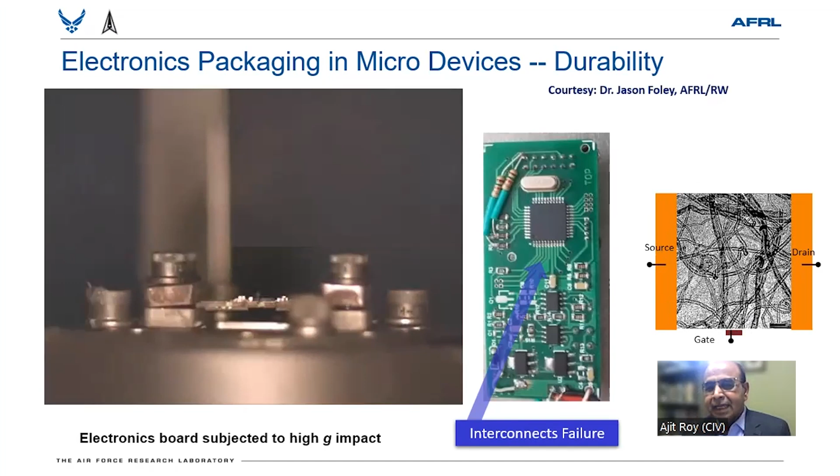locally to offer performance. So with this, I'm going to focus on this concept, for obviously you need flexible electronics: the nanomaterials-based flexible electronics concept by CNT mesh. That I'm going to talk about and use this example quite often.

Another example I want to bring up is, say, electronics packaging for high temperature environment. For example, engine performance monitoring, that's a big issue because if you can monitor in real time the engine performance by putting sensors in the hot zone area, that will give you a close handle in terms of maintenance and real-time repair issues, and hence reduce the downtime on the system performance.

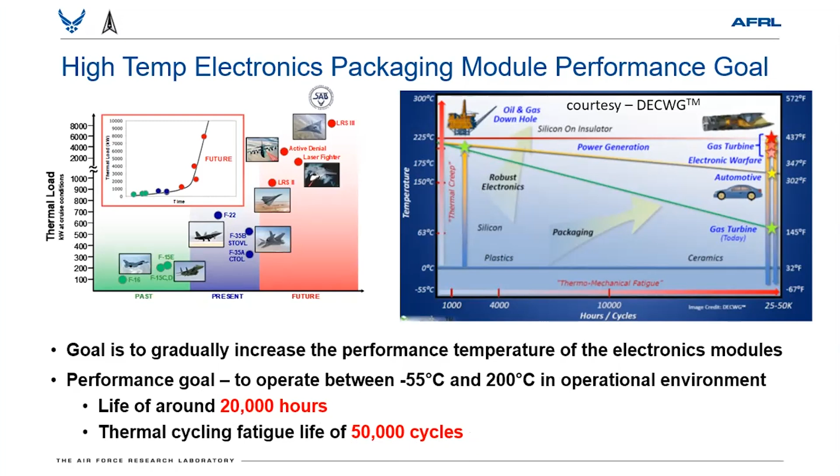In this concept, this kind of sensor's ideal or desirable goal is to perform 20,000 hours or 50,000 cycles, but currently there's no other materials that can offer this kind of durability. Current materials in electronics packaging offer only a few hundred cycles. So with the nanomaterials and materials hybridization, there's some opportunity space. That's what I need to talk about.

Here I want to bring up why bottom up. Bottom up means material design from small scale, meaning atomistic scale. So if you do hybridization, that's what the concept of composites is all about. Then I want to illustrate this concept with this classic example of the three-point bend test.

If you look at the three-point bend test, all the action, materials are going under high strain rate or doing all the work under the point load. So in other words, you need high performance materials near the point load applied, whereas at points away from this applied load, you don't need that kind of high performance materials. That's the idea of hybridization, to optimize materials usage as well as performance.

And if you bring this hybridization as small as possible, then you boost up the materials use efficiency as well as device performance. As I said before, this is a network of carbon nanotubes, and I'm going to make the point what we are after and why this dispersion of carbon nanotubes is not adequate. And similar thing with these multifunctional materials that we are talking about here.

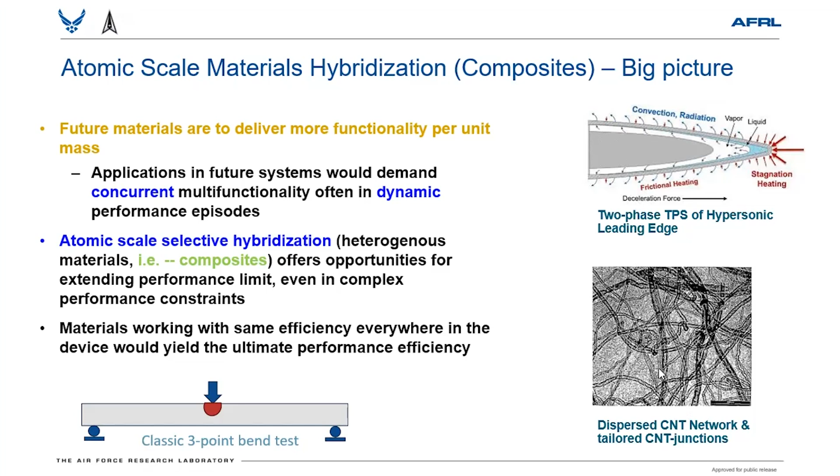So TPS these days is not just oxidation resistant or temperature tolerant material, but also you need to have other functionality like thermal and so forth. With this nanomaterials concept, we offer that kind of functionality. That's what I'm going to illustrate in this talk. So let me start with the very classic example of carbon nanofiber reinforced polymer composites.

You know, carbon fibers are quite strong structurally, and they have decent thermal and electrical properties along the fiber direction. Whereas when these are embedded in polymer, their transverse properties are not as good as in the axial direction, both structurally as well as thermal or electrical properties.

People in the community have been trying to grow carbon nanotubes, decorate carbon fiber with carbon nanotubes like depicted here, with the hope that when they are embedded in polymer, these carbon nanotubes will make contact and create a pathway, and this contact will provide some structural rigidity to improve the structural as well as thermal and electrical properties. But in reality, the achievement has not reached the level of the expectation.

Case in point: for example, epoxy strength is 6 KSI, whereas carbon nanotube is 40 GPa, or 40 MPa versus 40 GPa. So carbon nanotube is 1,000 times stronger. So if you mix, say, 1%, you expect the strength will go up proportionally, but that doesn't happen because of all the interface issues, how they are connected to each other.

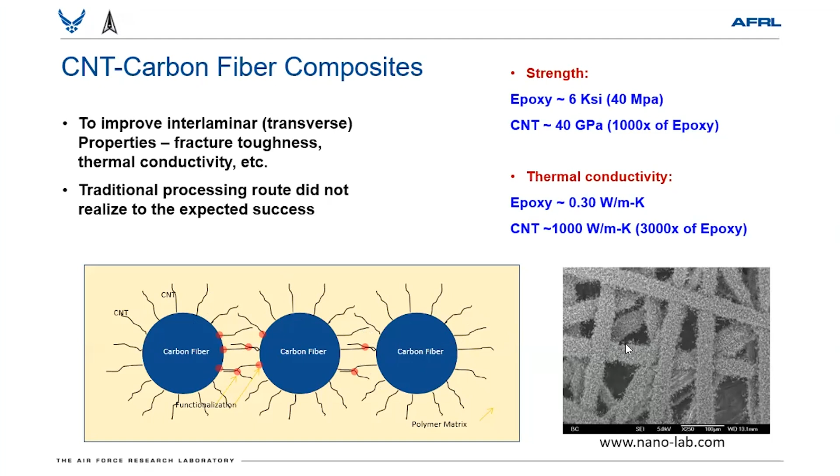Another key driver in this interface design concept, and also why carbon nanotube network with the connected network will offer higher performance as compared to dispersed carbon nanotube. Let me illustrate this with this example here. Say, carbon nanotubes are not infinitely long, they're discontinuous, and when they are dispersed in polymer, they are just dispersed in polymer, not necessarily making contact to each other.

Whereas if you can ensure these carbon nanotubes are interconnected with welded junctions, for example, then in case of this crack propagating, if they are not robustly connected in all the nanotube mesh, this individual nanotube will try to deter crack propagation, but not necessarily all other nanotubes will contribute unless their network is robustly interconnected with welded junctions and so forth. That's the concept. So with this network concept, we can boost up the properties that we are missing in just mixing carbon nanotube.

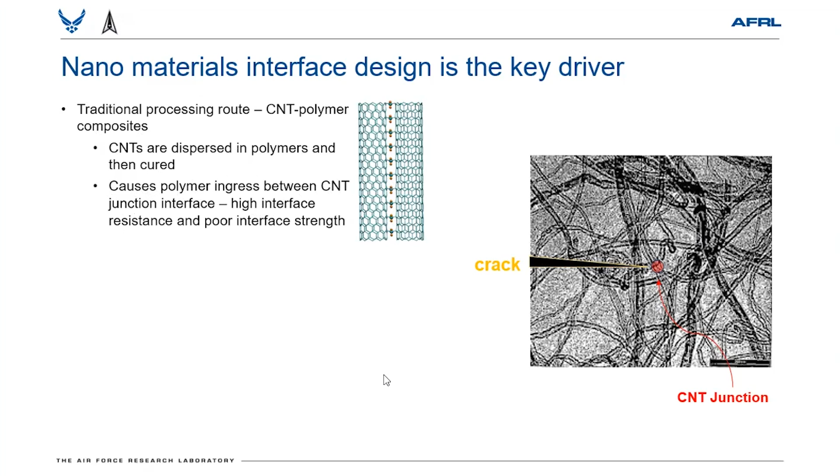So in the traditional processing route, you disperse carbon nanotube in polymer and hope they will provide the improvement, but that doesn't happen because as soon as you put nanotube in polymer, polymer gets in between carbon nanotubes, hence the interface will not be as robust. Whereas before you put the nanotube network in polymer, you create the network junctions by either heat treating to weld the junctions or decorating the nanotube with some other metal or other materials. Then by heat treating, that creates a network of welded junctions interconnecting nanotubes.

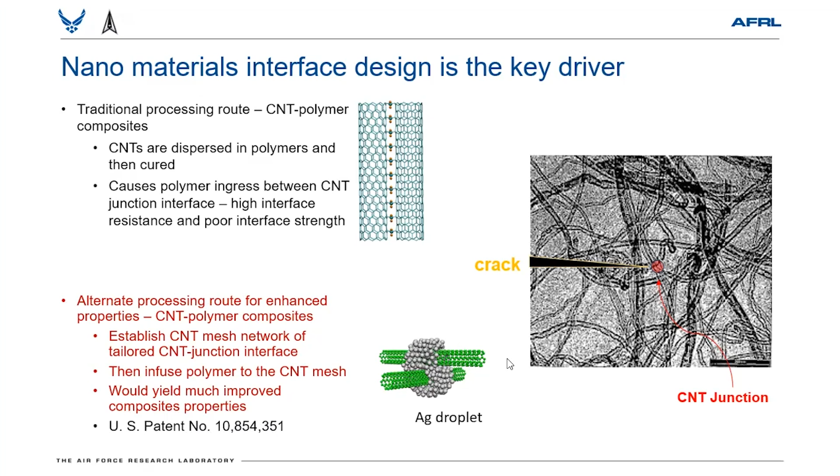After you create the network, then you infuse the nanotube network with polymer, and then you have the integrity of the network nanotube, and you will get the higher performance. And that's the process we have demonstrated, and we have patented this process as well. So this is what I am talking about. You create the network junctions of nanotube, then infuse polymer, then you get the improved properties. So this is an example of such a process.

This is the bonded joint, and I got motivated for this idea by Dr. Ed Silverman from Northrop Grumman. He told me that if the bonded joint through-thickness thermal conductivity can be improved from traditionally say 1 watt per meter Kelvin to 10 watts, there's a big savings, say $1 million per satellite. So that's the big savings over the lifetime of a satellite. So we developed a process.

We used aligned carbon nanotubes, then infused polymer and etched away polymer from the tips of the carbon nanotubes to make a thermal contact. That's what we came up with from our finite element calculations to create the thermal contact through the thickness of the bonded joint. And in this process, after etching polymer, we decorated the tips of carbon nanotubes with metallization, called ion etching, and that is documented here. And then we cured the bonded joint.

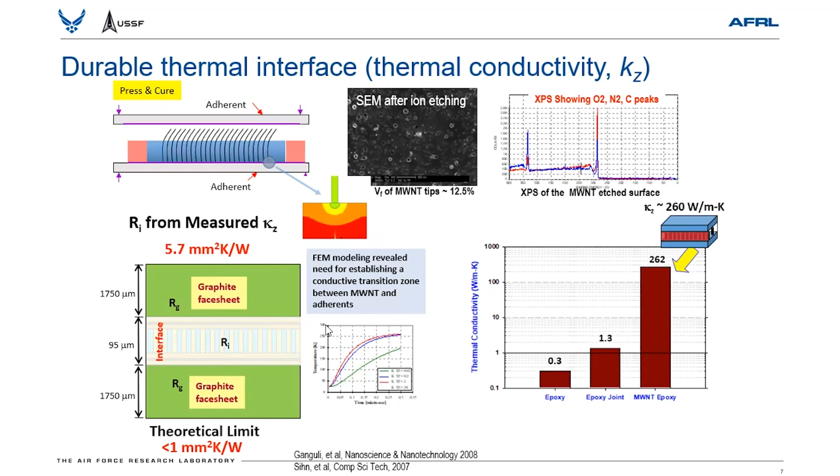So we want to look at this problem a little further. From these measured properties, we back calculated the interface between carbon nanotube and this conducting sheet. And the interface resistance comes out to about 6 in this unit, whereas if you do the right engineering, you can go to less than 1. So there's still room for improvement even if we showed good success in this design. That brings up the point of looking at this problem more atomistically, hence bottom-up design. That's the nutshell, the message I'm conveying here.

So what is the bottleneck and what is the challenge? If we want to pursue this networked carbon nanotube mesh, how do you design the interface? As I showed in the previous example, the interface is the key. Unless you do the right interface design, you will not achieve the properties. There's nice work from over a decade ago on dispersed carbon nanotubes. Nothing is done on interface design, just laying one on top of the other. And with AFM, atomic force microscopy, they measured the electrical resistance of carbon nanotube along the length, then at the junction.

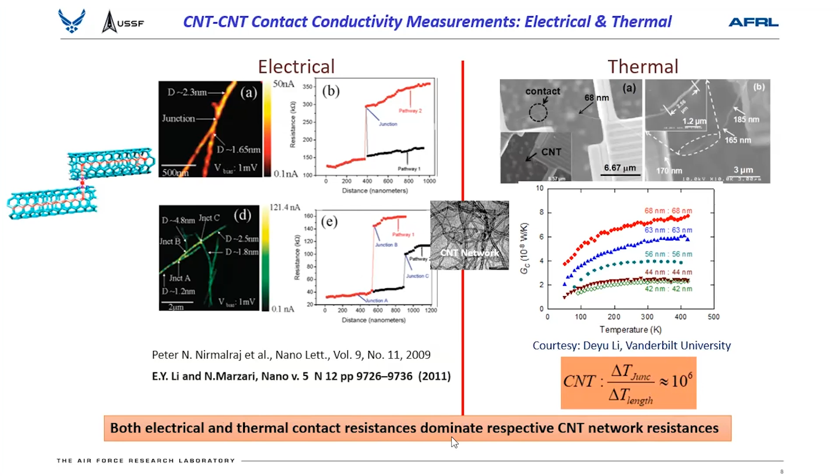If you follow the nanotube across the junction, same nanotube, there's not much of change. Whereas if you jump from one nanotube to the other nanotube through the junction, there's a big resistance. This interface resistance is quite high unless you tailor this interface properly with nanoscale material design. This is for electrical. Same is the case for thermal, and that interface resistance is very high as compared to the individual carbon nanotube resistance.

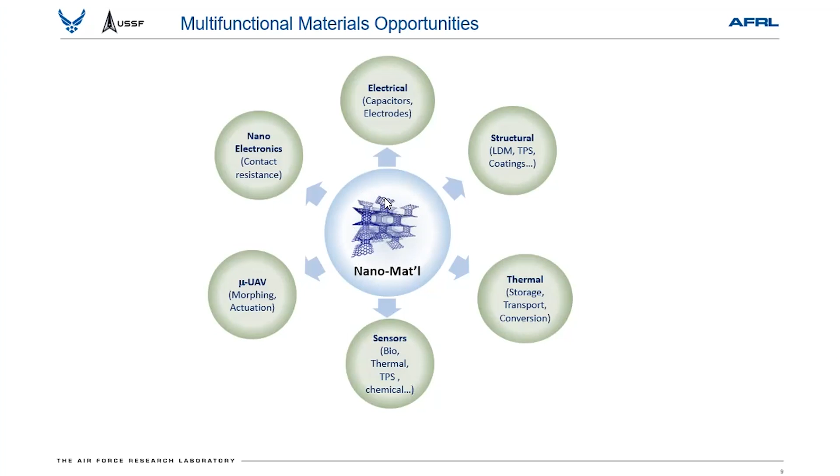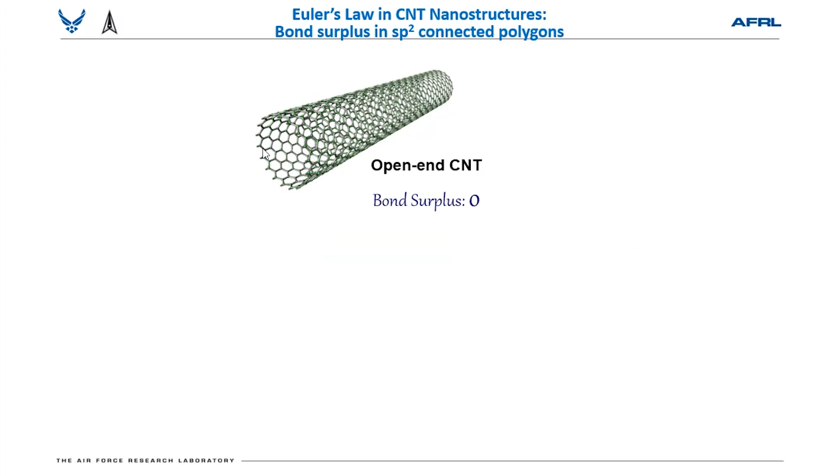So first, let me focus on the structure, meaning I'm looking at it from the strength point of view. So from a strength point of view, how do you create this kind of junction or nanotube? There's a way to look at the junction optimization. Euler law for CNT nanostructure based on sp2 bonds means nanotubes are planarly junctioned to each other. For sp2 bonded nanotubes with open ends, with the energy, we can benchmark to 0 level, called bond surplus 0. All carbon nanotubes in this case are 6 member rings.

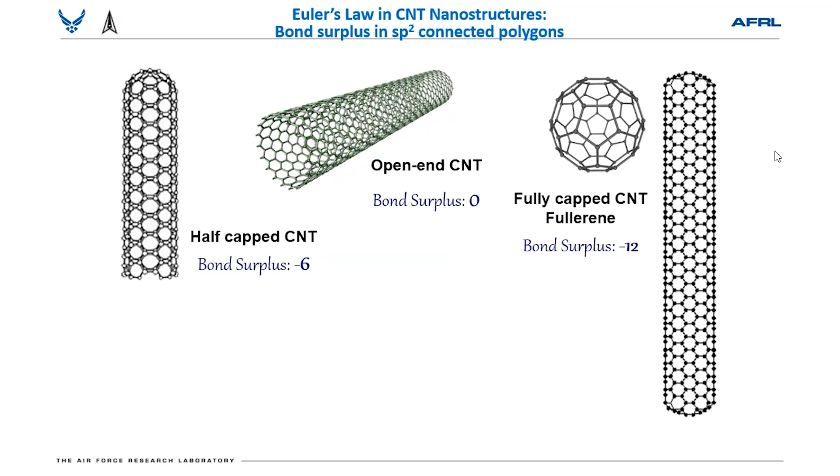And then when you look at the other geometry, half-capped CNT, meaning this end is capped, then you no longer have only 6 member rings. There are some 5 member rings, and you need 6 of them. So that brings bond surplus minus 6. If you do double-capped CNT or fullerene, because of the same concept of 5 member ring accommodation to 6 member rings, bond surplus becomes minus 12. For a junction like graphene to CNT, you need 7 member rings, and that brings bond surplus plus 6.

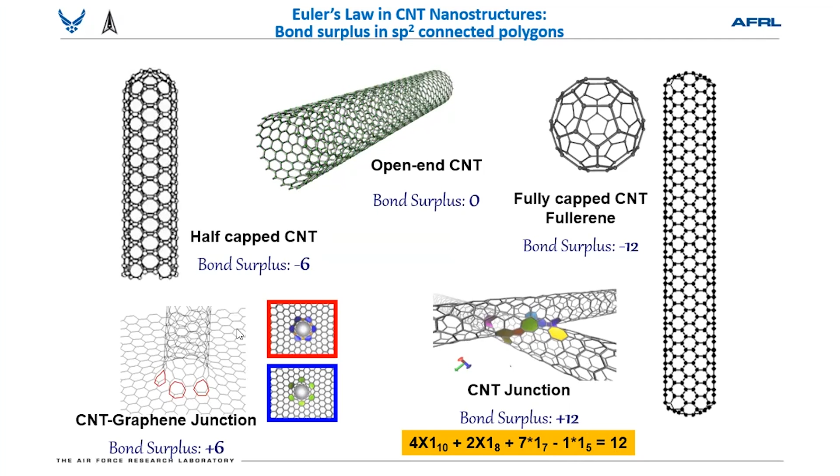For CNT-CNT junction, such abnormality, meaning deviation from 6 member to 7 or 5, the bond surplus for minimum surface energy of the surface topology brings bond surplus to plus 12. That's the basic design concept in terms of creating junctions from the strength point of view for carbon nanotube structures. So we have done the strength prediction with this surface topology optimization, adapting the tools we have developed, molecular mechanics and molecular dynamics. Molecular mechanics is similar to molecular dynamics, but we took away the dynamics part to focus on static problems. Combining these two, we can create the junction as well as analyze the strength. This is the case for graphene with carbon nanotube junction.

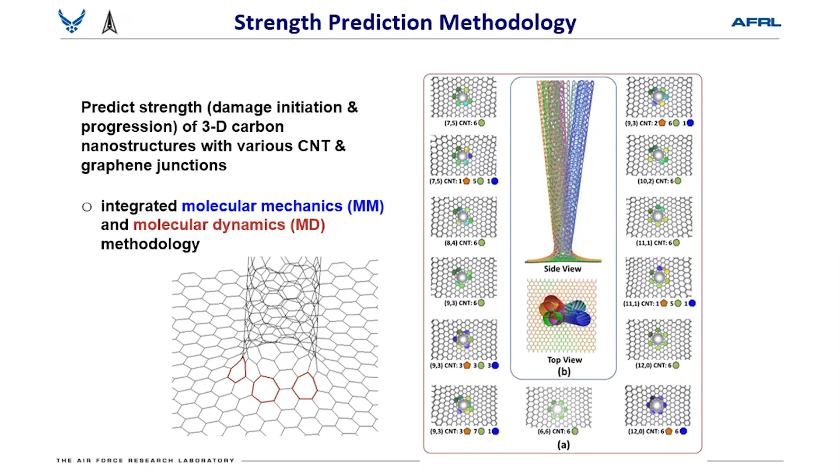Of course, carbon nanotubes have different chirality, and that gives the challenge. As I said before, to create this kind of junction, we need 7 member rings to accommodate this kind of curvature. And depending on the chirality of the nanotube, the distribution of these 7 member rings around the circumference of the junction sometimes gets irregular, not uniformly distributed, unless it is armchair, 6-6 ring, where these are equally distributed around the junction circumference. So with this, we did the calculation for strength prediction for different chirality junctions.

As you see, for armchair, 6-6 ring, these 7-member defects are uniformly distributed across the junction area, and that is like structural mechanics. When your defects are uniformly distributed, that gives you a higher strength or load carrying capability. The same is true here. As you see, when these defects are regularly distributed, we get higher strength as compared to the irregular distribution. So that's the design area if you want to join graphene to CNT.

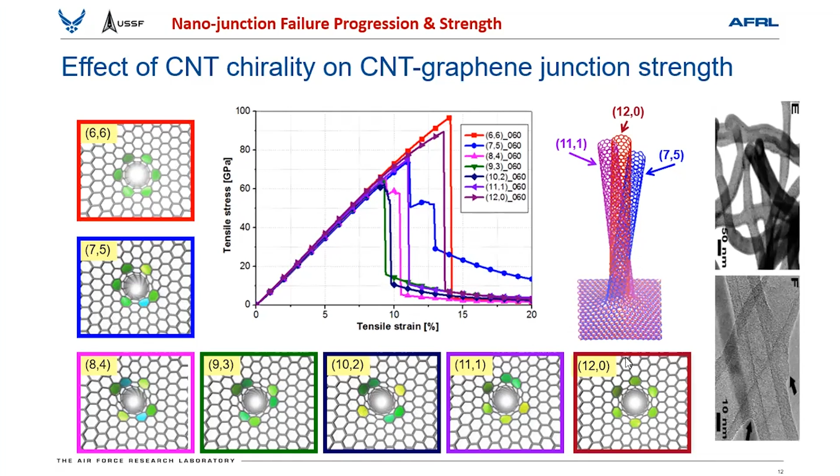But more practical option. Oh, so one more thing I want to say. Those calculations are very idealistic cases, meaning very pristine CNT, but in reality that doesn't happen. When we compare our prediction with the measurement, this is the work we have done in collaboration with Professor Jun Lou from Rice University. He did the strength measurement with AFM. The measured strength is quite low, 2 orders of magnitude, I would say, lower than what we are predicting.

Reason being there are many other attributes, irregularities, taking place in the experiment. For example, some nanotubes are not attached to the carbon fiber surface, or some are with defects, and all these factors play a role in terms of what we measure.

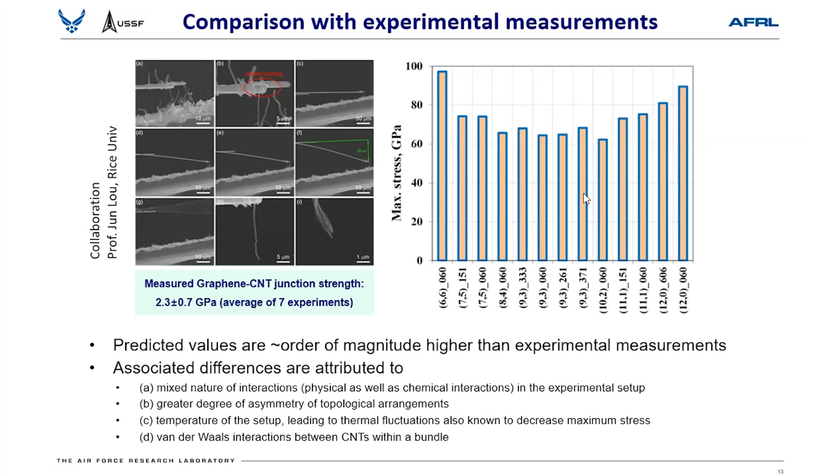So then we have a long way to go to relate our computation and small scale to the real measurement properties. But computation gives you a trend that will be a guiding principle for designing materials nonetheless.

So next, we want to go to a more practical example. As I said, carbon nanotube mesh. That's the idea. So when you want to join the carbon nanotubes next to each other, as I said, all the defects you need to optimize, 7-member, 8-member, or 5-member, and their distribution. And their distribution depends on how they are connected to each other, either fully fused or barely fused.

And so we look at all these problems, and with this calculation, we find, as you see, the barely fused junction gives you higher strength as compared to fully fused. Although one may assume that, okay, fully fused will be more robust.

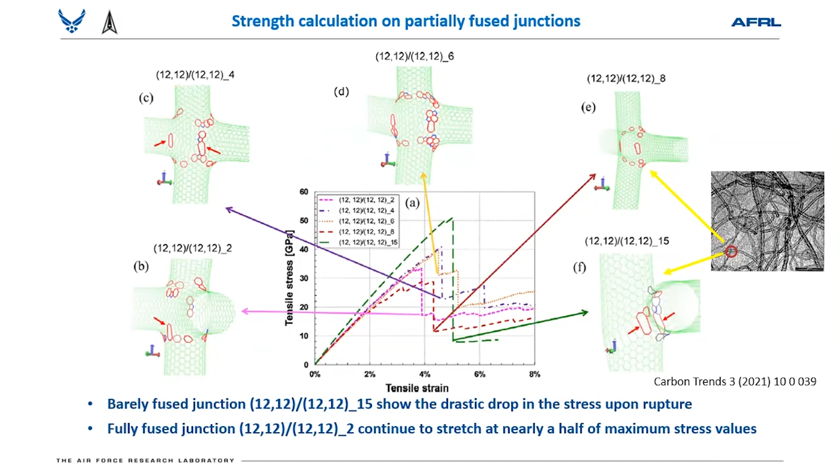That's not the case. Reason being, when you are fully fused, you are destroying the nanotube integrity, hence its load carrying capability, as compared to barely fused, where you retain as much of the bond integrity within the carbon nanotube or atomistic configuration than the fully fused.

And from a practical point of view, this makes sense because from a processing point of view, it's also easier to fabricate, because you just lay carbon nanotubes on top of each other, then do heat treatment. That would create a welded junction, versus creating this kind of junction is more tedious because that requires more process control and also computation from doping and so forth.

So this computation gives guidance to processing engineers on how to design this kind of junction. And we are the first to show that overlap junction creation is much easier and also, from a strength point of view, robust as compared to the fully fused junction.

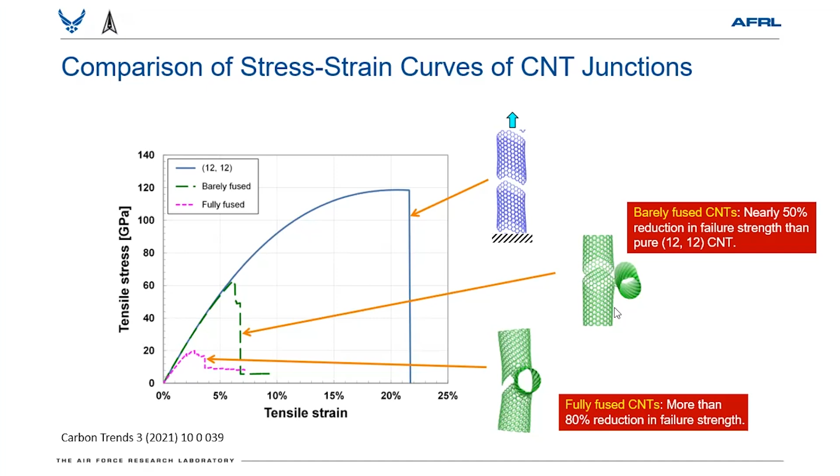Now I'm going to go to the thermal part. So as I said, thermally mixing carbon nanotubes with each other doesn't give you the improvement in thermal conductivity. So we want to look at this problem very carefully. As I said before, this is also a thermal interface design issue. So this is the case.

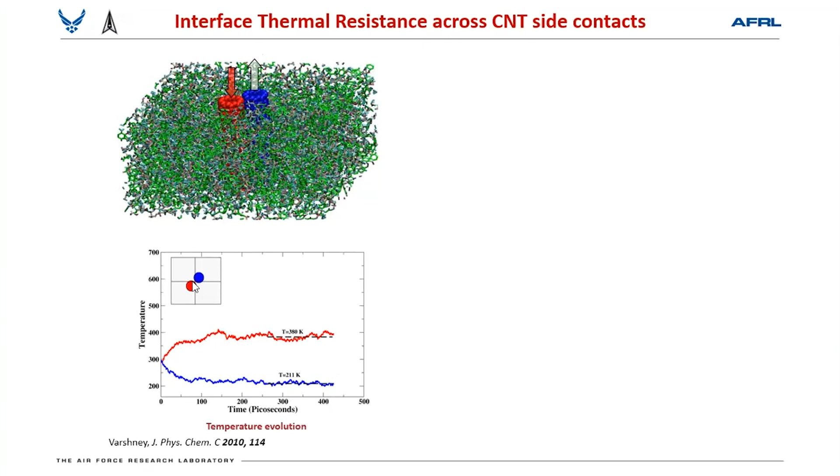We are putting two nanotubes next to each other, and we are heating one and taking heat out. And after equilibrating, we see there's a disparity in temperature, even at the walls next to each other, of this cold and hot nanotube. That means there's a significant thermal resistance at the interface of these two junctions.

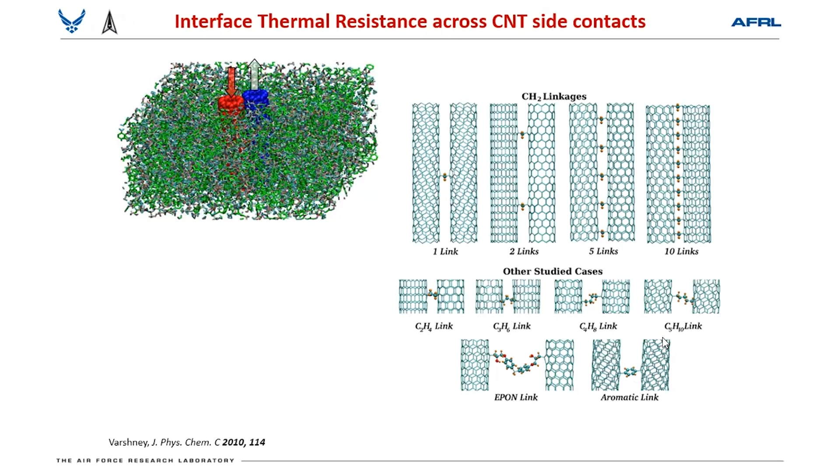So another option will be to functionalize these nanotube walls instead of van der Waals walls. You can functionalize with different molecules, either small molecule, big molecule, rigid molecule, and soft molecule. We look at those problems.

Of course, increasing the degree of functionalization improves the interface thermal conductance, but still we are not seeing the resistance diminish to zero. That means there's room for selecting this molecule. So we look at different types of molecules.

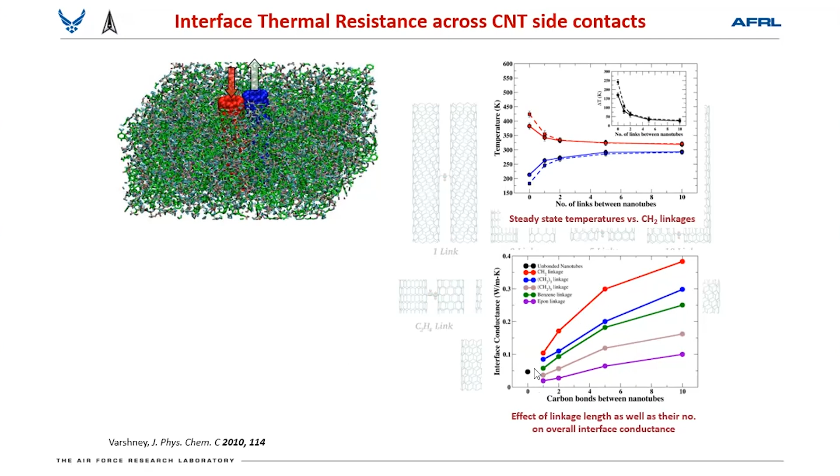We find that smaller molecules and rigid molecules give you higher conductance than van der Waals properties. But still, there's room. How do you select these molecules? We then looked at this problem more carefully with a wave packet calculation, or phonon wave packet.

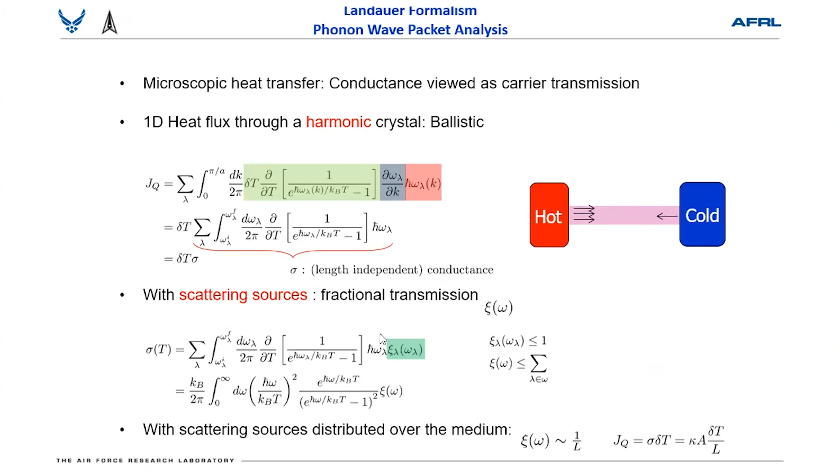In this calculation process, we look at energy specifically, where we can send one specific frequency of phonon and look at the transmission coefficient. And that transmission coefficient will give you an indication of how robust the interface conductance is. So where you put the molecule for functionalization, that's the site.

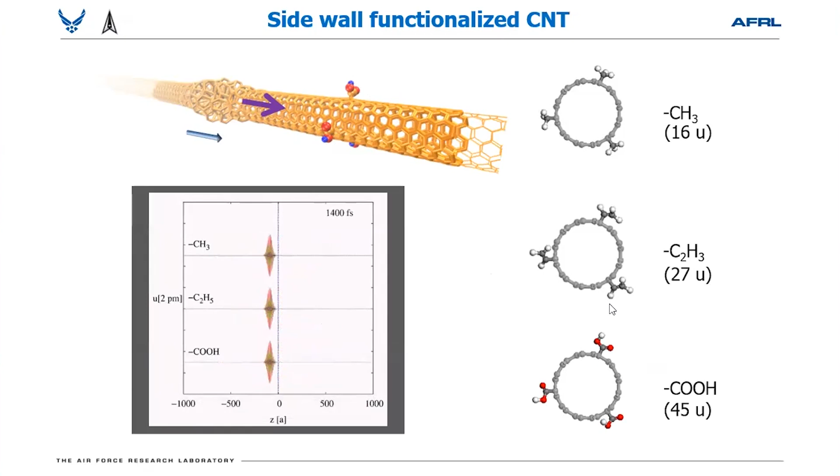Some energy will transmit, some will reflect back, and that can be assessed properly, and their efficiency can be assessed by looking at their dispersion curve. The slope of the phonon dispersion curve is the group velocity, and that group velocity is integrally proportional to, or follows, the transmission coefficient in respect of all the different molecules we have here.

So here is the design selection criteria of molecules: you can pick a molecule that gives you higher group velocity as compared to low velocity. And the group velocity is proportional to the bond modulus of the junction of the molecules and inversely proportional to the mass. So the smaller the mass and higher the bond energy, the higher the thermal conductance.

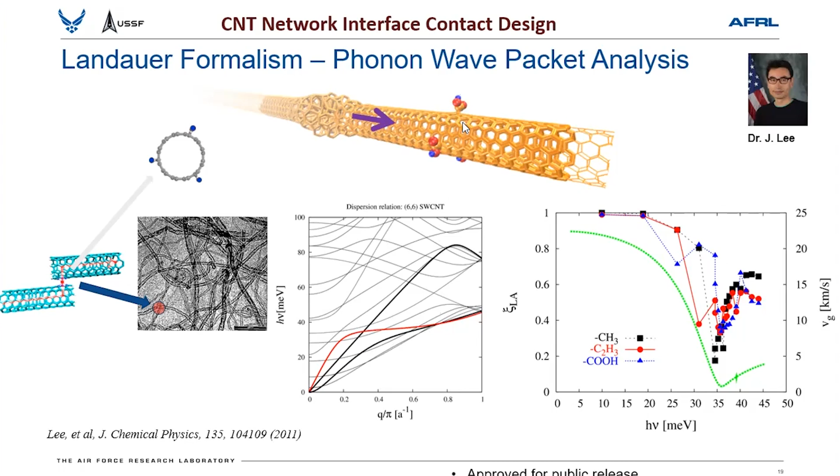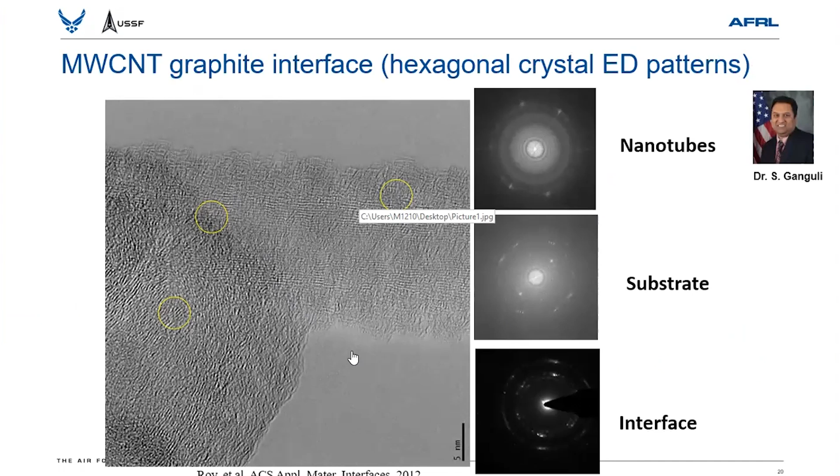So in the case of carbon nanotubes, to maximize that, you need to minimize the difference in mass and also bond. You need a similar molecule. If it is carbon, it has to be carbon. And that's the ideal interface. And we created those interfaces, but those are very tedious and time consuming and practically probably not feasible.

Instead, we can adopt metallization, because metal is conductive. What if you put metal at the interface? That's where design comes in. That can be assessed through density of states spectra, phonon density of states: overlap of the density of states of the metal you are decorating with, or putting at the interface with the nanotube spectra, phonon spectra, gives you a higher, improved interface conductance. That we have done.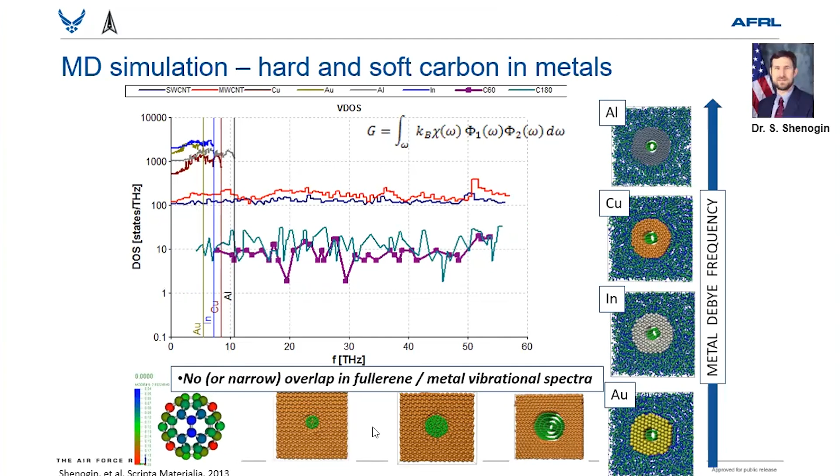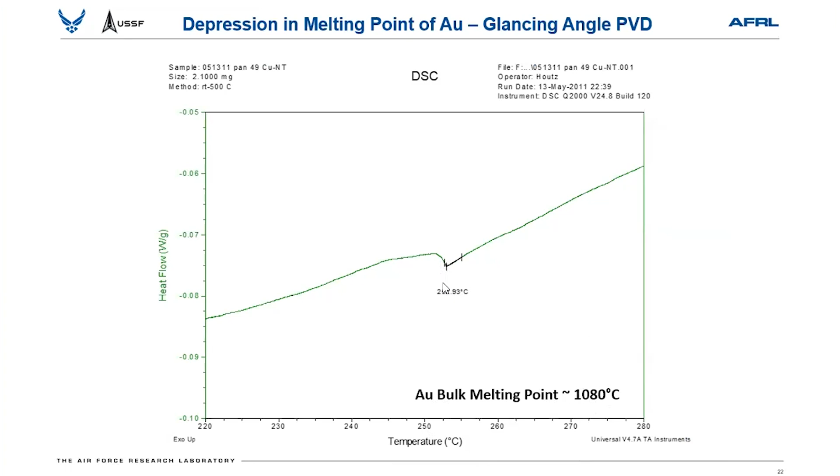So you can pick different metals: gold, copper, aluminum, and so forth. We demonstrated that with gold. Gold's melting point is over 1,000, whereas carbon disintegrates after 550 degrees Celsius. So how do you tackle this issue? But there's a brighter side. If you make it nano size, in this case 5 or 4 nanometers, we see the melting temperature of gold drops to 260 or so.

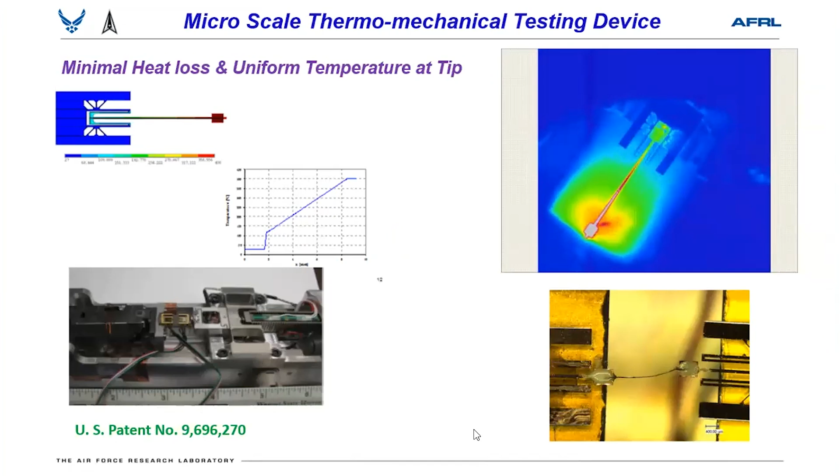So with this, we decorated nanotubes with gold nanoparticles of different sizes, and also with other metals. And we found, as we predicted computationally, chromium, titanium, copper are much better than gold. And that is validated experimentally. We measured those properties, and those measurements are done on a micro scale testing device we have developed, and that is patented, in our laboratory.

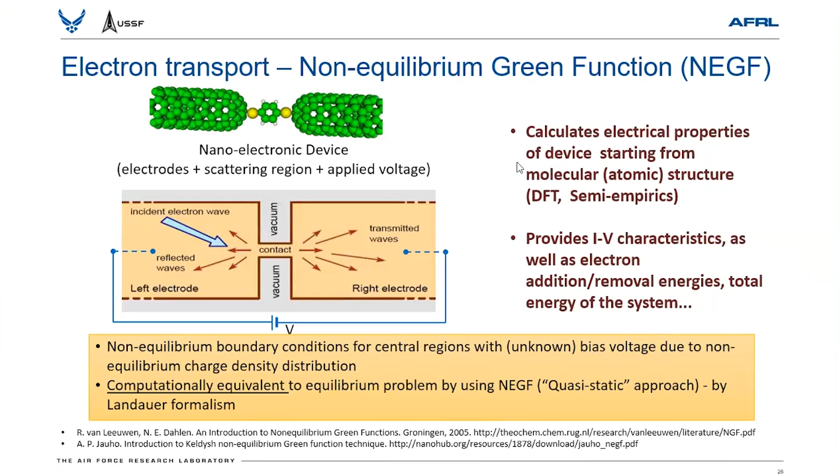Now, the final topic: electrical properties that we looked at at the interface by tight binding non-equilibrium Green's function, and we have published this work. You can follow it. Because of time, I'm not going to talk about the methodology. But what I'd like to say is, in the case of this junction design for electrical conductance at the interface, electron orbitals play a role. Overlap of electron orbitals dictates the electrical conductance.

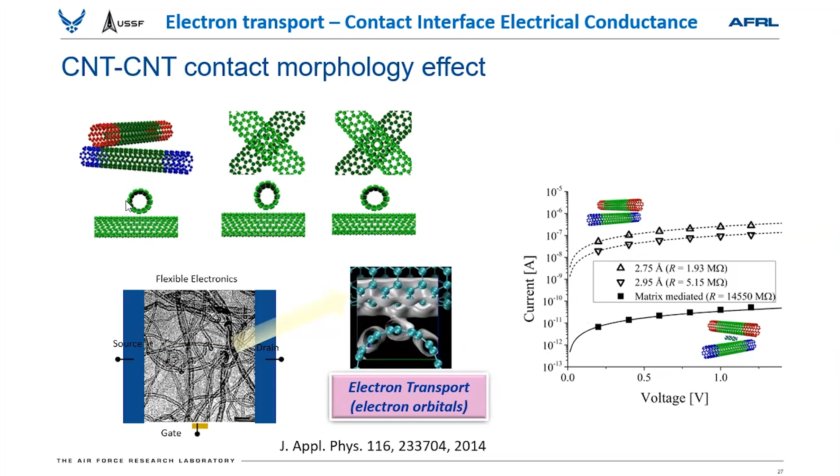If you make carbon nanotubes smaller, their electron orbitals spill out of the circumference, hence the higher overlap. And that's what we observe. At the same time, if you put some molecule in between, that kills the conductance. So from the design point of view, smaller nanotubes packing close to each other without any polymer functionalization will give you higher electrical conductance. Another option will be metallization.

You can use different metals to decorate the nanotube interface and fuse them, and they give a higher improvement, 200 to 400 fold in case of titanium and copper, silver. One point I'd like to make: in thermal, we saw that titanium is the preferred metal for interface welding, and so is the case for electrical. So that gives you the simultaneous functionality that I mentioned at the beginning of my talk.

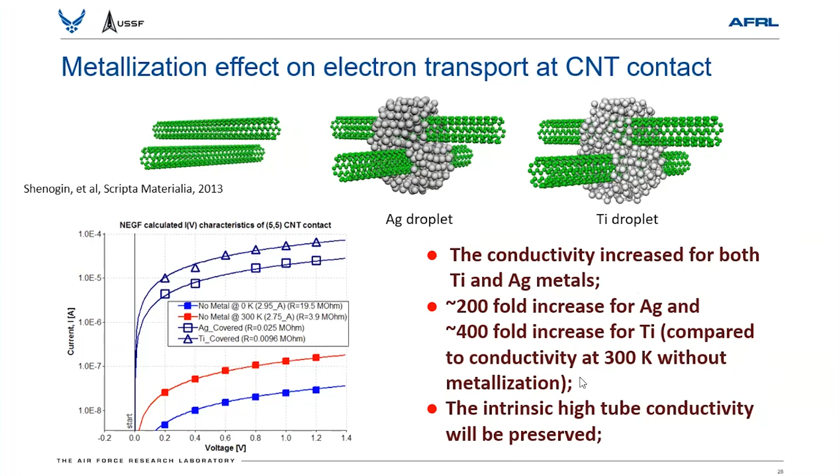So after all this, we made some materials without functionalization. Then we tested them. This is the moment of truth: split Hopkinson pressure bar test, high impact, high g testing. And we found that with this CNT mesh optimization, interface design, and putting in polymer, creating a CNT ink, this material survived the high impact scenario, whereas without modification, we didn't get any signal.

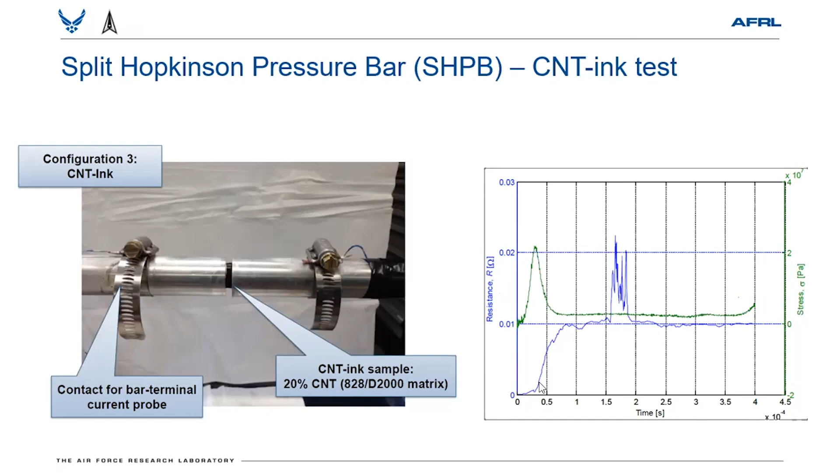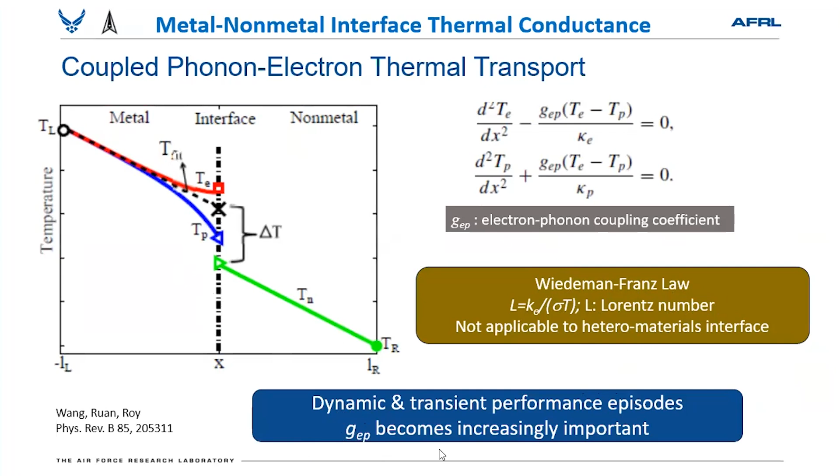Other, similar topics: there are some issues for metal/non-metal interfaces, where electron-phonon coupling plays a role, where the Wiedemann-Franz law, which is good for homogeneous materials, would not work because it's a heterogeneous material interface. That's where this electron-phonon coupling parameter needs to be predicted. And that's an open field still being worked on.

Another point I'd like to make: as we go from small scale to a bigger scale, the size of the individual material constituents plays a role. So how do you say what is the design factor? In the case of thermal, if the material is very pristine, the phonon mean free path will be very large. When it's defective, the phonon mean free path is small. If the mean free path is small compared to the size of the domain, then the interface plays a role. Whereas if it's large, meaning pristine material, the interface will not be an issue. Those are the design rules we can follow.